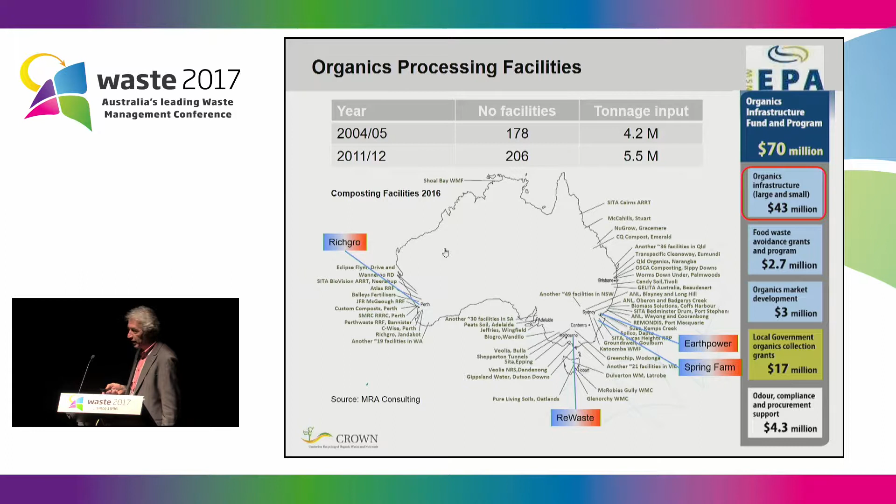We do have some anaerobic digestion facilities. They're generally wet facilities, as was talked about. I'm not from New South Wales, so I'm not really au fait with what's happening there. I'm not sure if there are two or just one operating, but these were still on the web. Particularly here in New South Wales, with the EPA providing money for infrastructure, there will be more composting facilities, and probably more anaerobic digestion facilities too. Therefore councils and service providers really have to look at what technology is best, what suits the specific environmental conditions and particularly the material flows.

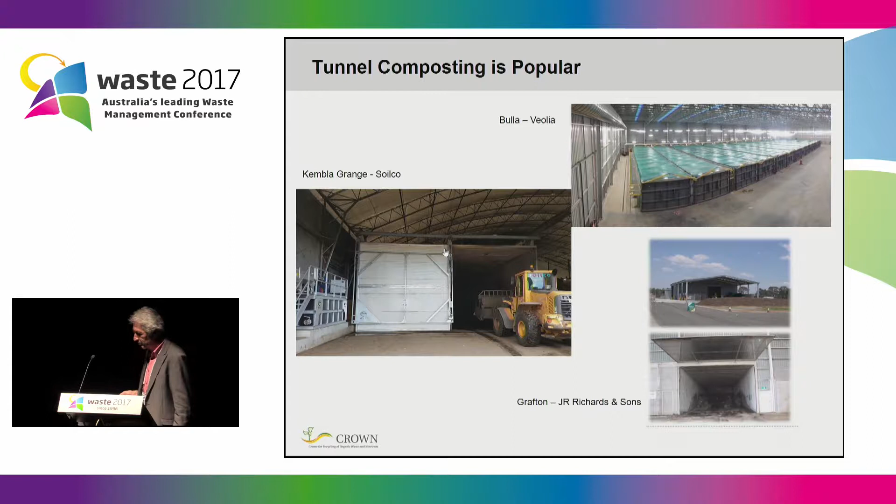Tunnel composting has become popular, particularly in New South Wales, because the money and government support are there to do it. These ones are here in New South Wales. That one is Veolia's facility in Bulla, but box tunnel composting has turned out to be the preferred option, and these facilities are being built. My question is, if you're doing tunnel composting, why not think about tunnel digestion? It's pretty much the same, as you can see here, doors loaded with a loader, not much different.

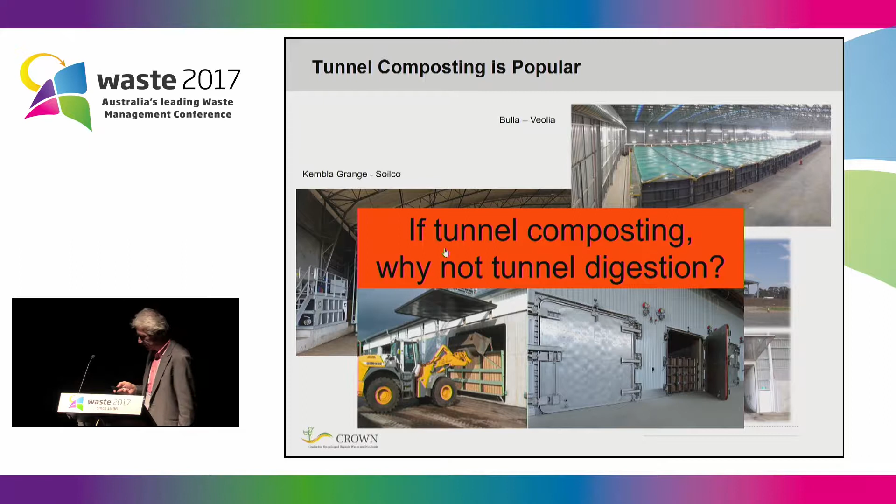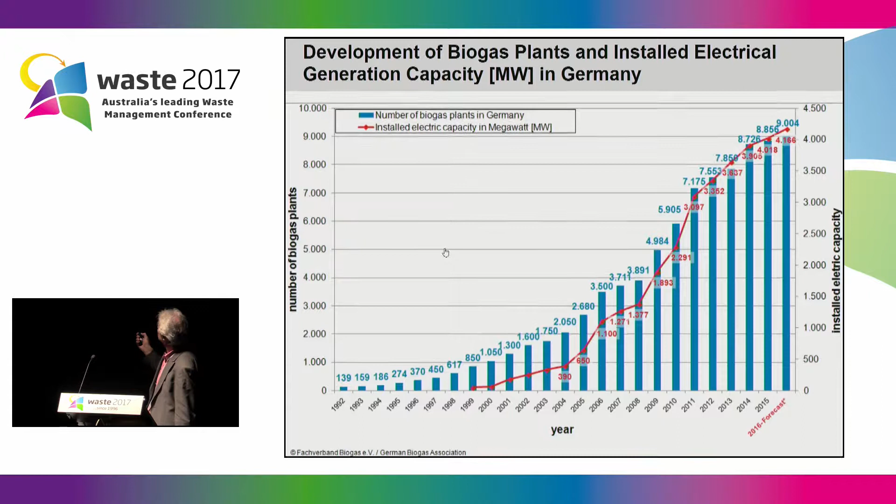Some of you might have seen this graph. It's pretty famous - this is the development of anaerobic digestion facilities in Germany. Around the turn of the century it just skyrocketed: 9,000 facilities, 4,000 megawatts, impressive, but most of it doesn't touch waste management at all. The vast majority are agricultural facilities using energy crops, so it's not really relevant for you.

These are figures from 2014: 75 plants processed FOGO, and about 40 were primarily commercial organics.

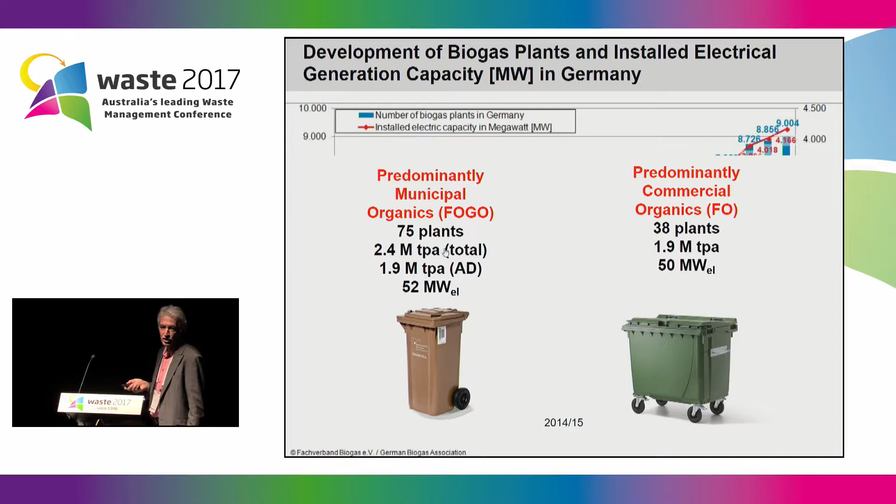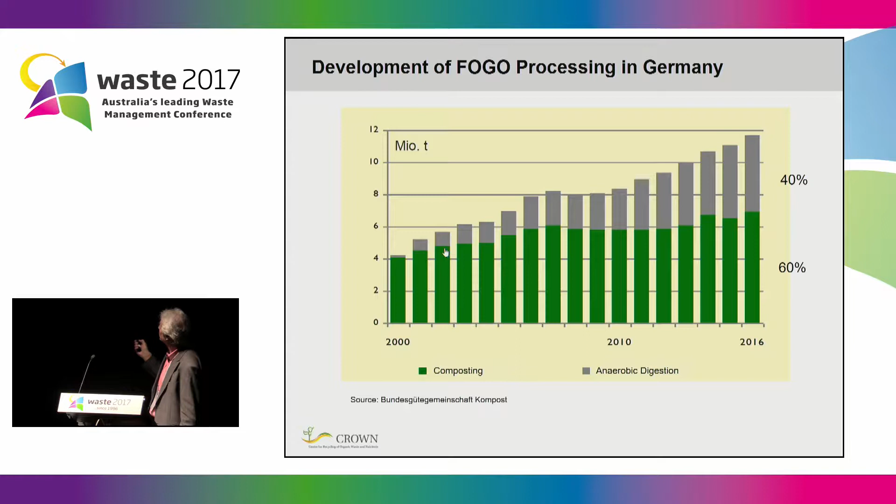This development really had an impact on the organics recycling sector. The green is the composting capacity in million tons, and the gray is anaerobic digestion. From around 2007-8, composting wasn't really increasing in capacity - that's sort of a perception. Composting is always part of anaerobic digestion, but all these facilities had anaerobic digestion as the first step. Today it's about a 60-40 split.

Just very briefly, the theory: wet digestion, we talked about that. Dry digestion with 25 to 35% dry matter, and then dry digestion 33 to 50%. This is really about what comes out of the curbside collection bins, and discontinuous or batch fermentation processes are designed specifically for this type of material. So the material flows you have and are aiming to deal with determine the type of technology - whether it's wet, continuous dry digestion, or discontinuous dry digestion.

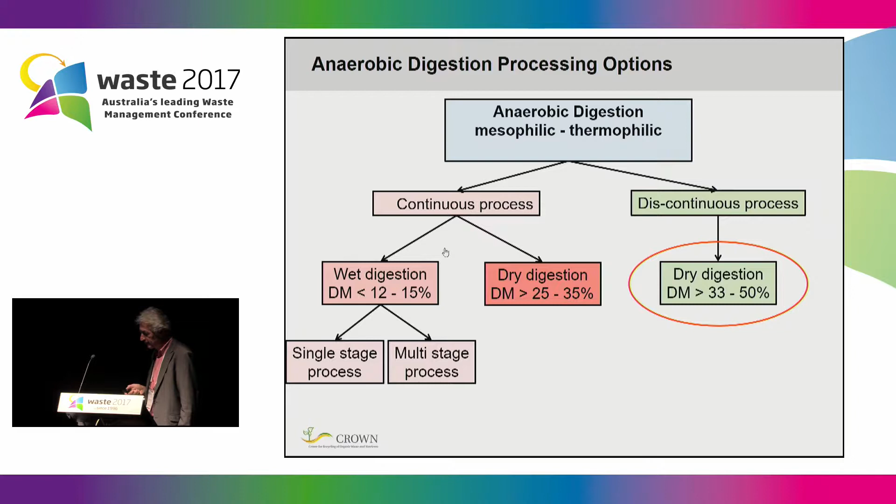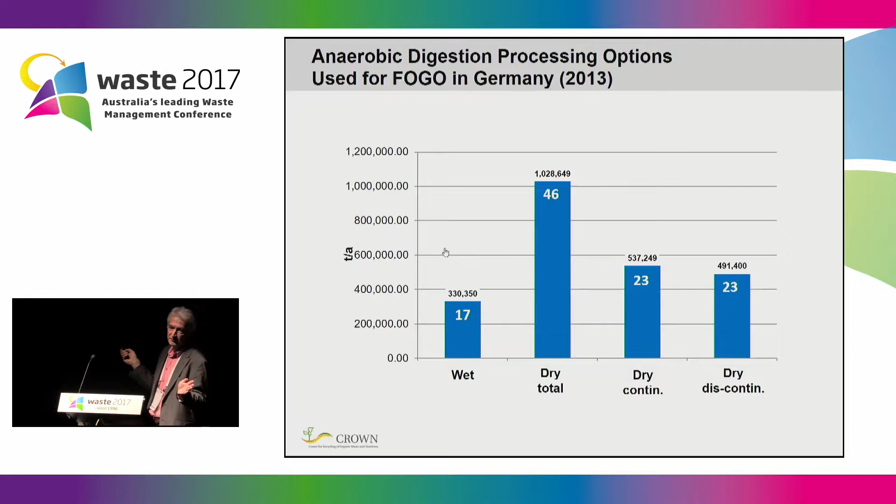We're not in the business of selling any technology, really just presenting it. This is the discontinuous type, and Mark Stenberg presented on this one last year. I just want to say this is also a possibility - you may have to add more water, or your whole feedstock has to have a higher moisture content. But also there are quite a number of different technology providers. It's really been well developed - a lot of changes, buyouts and whatever in this sector, but there are still 5-6 significant suppliers in Europe.

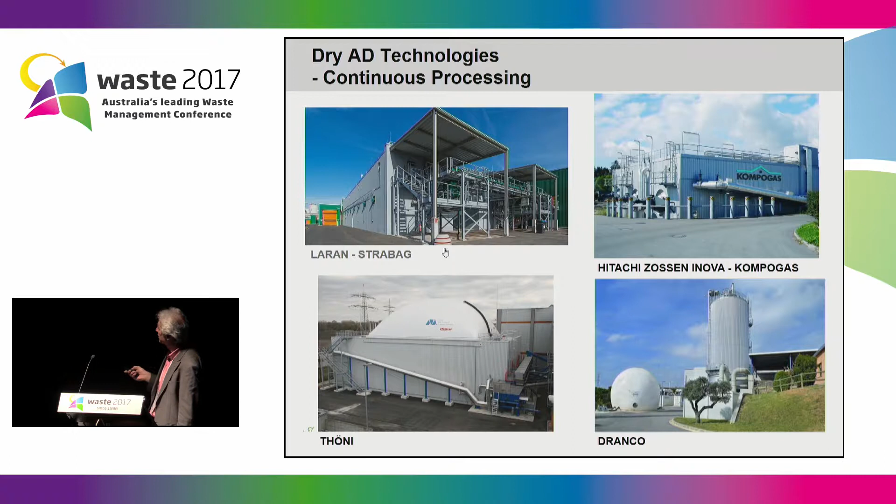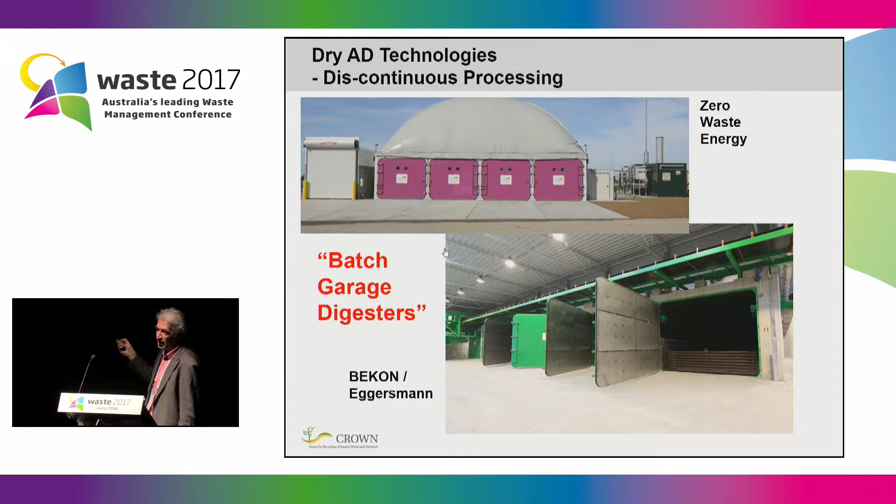This is what I want to focus on. They're primarily, I think, based in Germany, but this one is also a US system. So the idea really spreads because it makes sense - at least it makes sense to me. You can also see the system is pretty much the same as tunnel composting. You've got a door - this one is a bit odd shaped - but this is really the gas collection.

This is just a schematic view. This is essentially the box - it's filled with a loader. You're able to irrigate it, to put percolate in it to keep the moisture content there, but also to introduce the anaerobic bugs who will do the work. This is a collection system for the percolate, so some is circulated. You probably will have some surplus, but not very much. It's heated just in the walls or the floor, and has got a combined heat and power unit attached to it, supplying the heating but also the energy, the electricity.

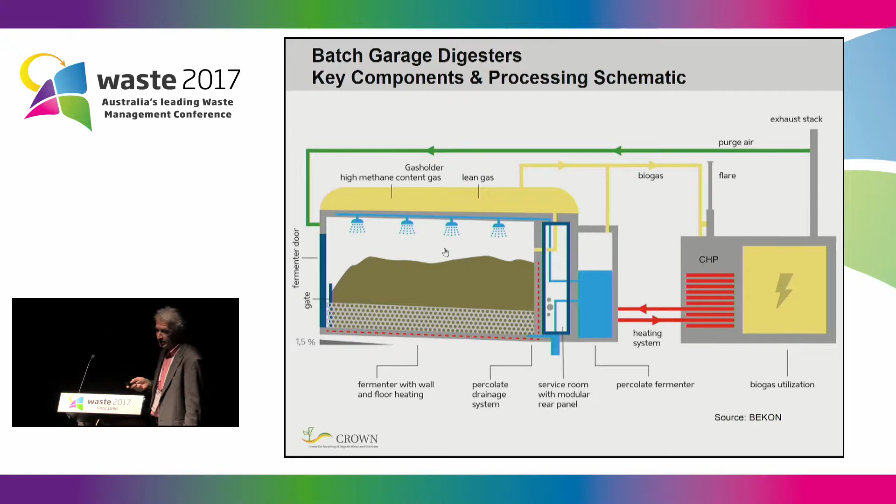Just very briefly, the processing stages. The first stage is aerobic. Essentially, air is being blown in, the normal composting system kicks in, the material heats up, which brings it to 50 or 60 degrees, and that's the desired processing temperature. At that stage, air is blown in, but no circulation of percolate or anything.

The second stage, you cut off the air supply, put in the leachate, introduce the anaerobic digestion bacteria, they get the anaerobic process started, and it stays like that for probably 2 to 3 weeks. Then the third step is you reverse that. Some of the remaining gas is just flared off, but then you introduce air again, make it aerobic again, so it's not an odor problem when you open the door and take the material out.

I forgot to say, during that process, biogas is generated here in the percolate store, but primarily out of this area, and it's just stored in a big plastic flexible container, and then going to the electricity and heat generation unit.

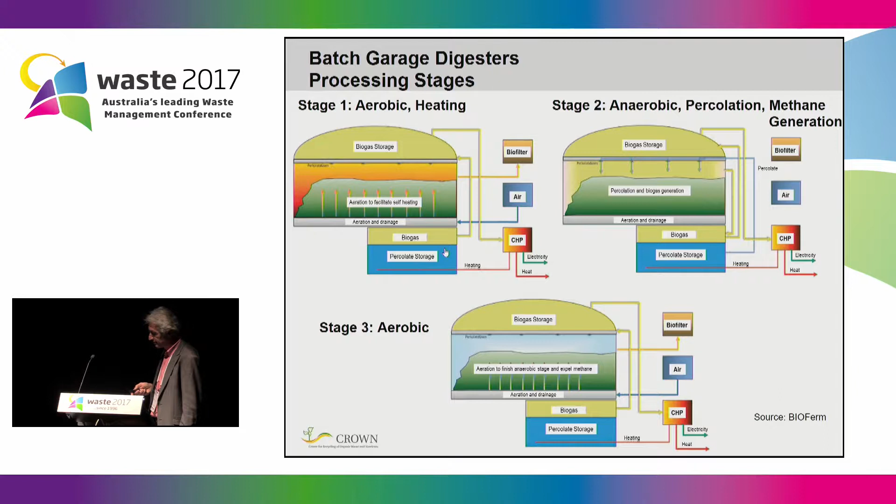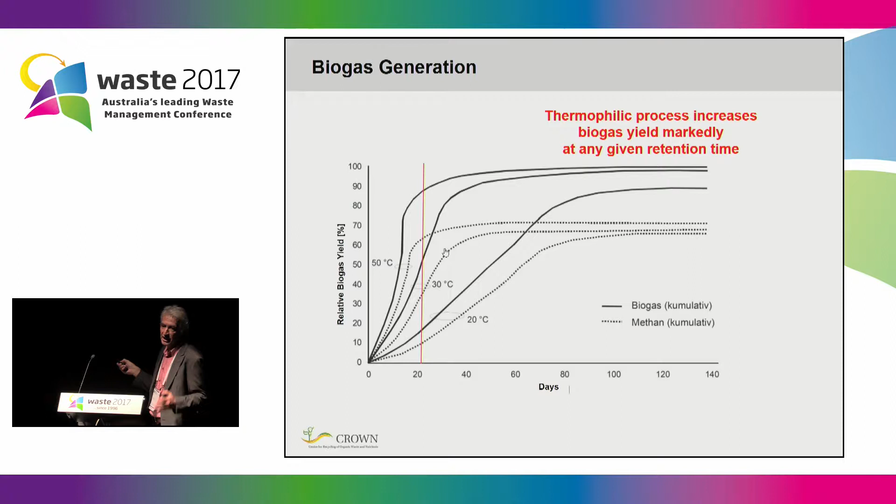This is a curve of methane and biogas generation. Biogas has about 60% methane, and that's really what you want. This runs at different temperatures. So if you do it at 50 degrees, you're probably 2 or 3 times as fast as if you do it at ambient temperature around 20 degrees. That's the reason why it makes sense to heat that chamber, because you do have the heat on site.

This is the methane generation curve from one unit over 20 days. Obviously it goes up and then slowly declines. And the aim of these facilities is not to generate maximum gas yield, but really to look for the economic optimum.

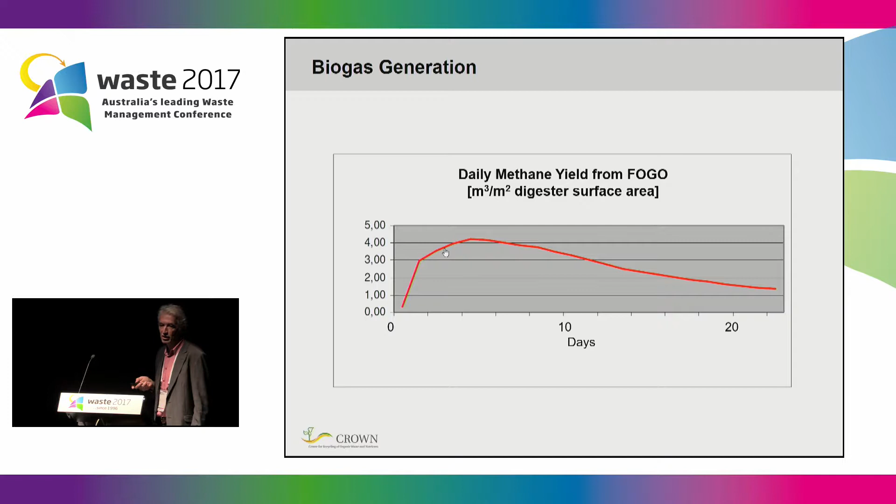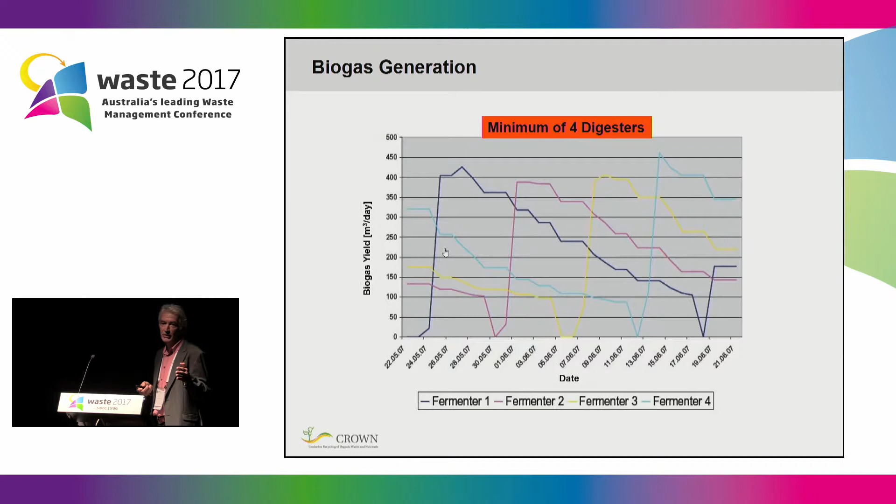The minimum to be able to generate a reasonably equal gas flow is you need 4 units, just because it goes up and then slowly down. So this is one of the constraints, but the units can be made any size you would like to have.

Biogas yields - if we just look at garden organics and food and garden organics, it's not ideal, but it's also not too bad. And as many composters do at the moment, if you also have some grease trap waste, adding some of that will certainly improve your yield and your economic viability.

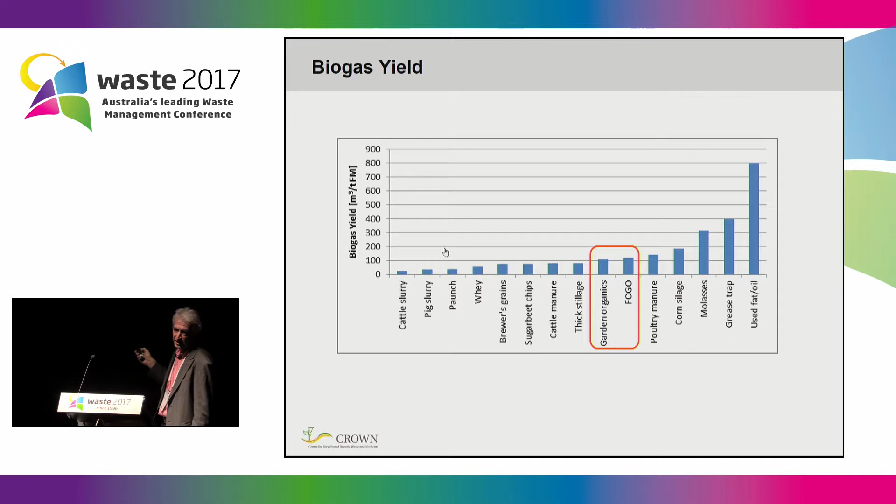And here, this is corn silage. That's what a lot of farmers in Europe do. So they would be ahead of the game, but still they have to produce that corn and make money out of it.

Just some average figures, or range figures rather, because it really does depend on the feedstock being processed, and to some degree also on the technology. But as a rule of thumb, you can say 1 ton of FOGO gives 100 cubic meters of gas at 60% methane, which is 600 kilowatt hours of energy.

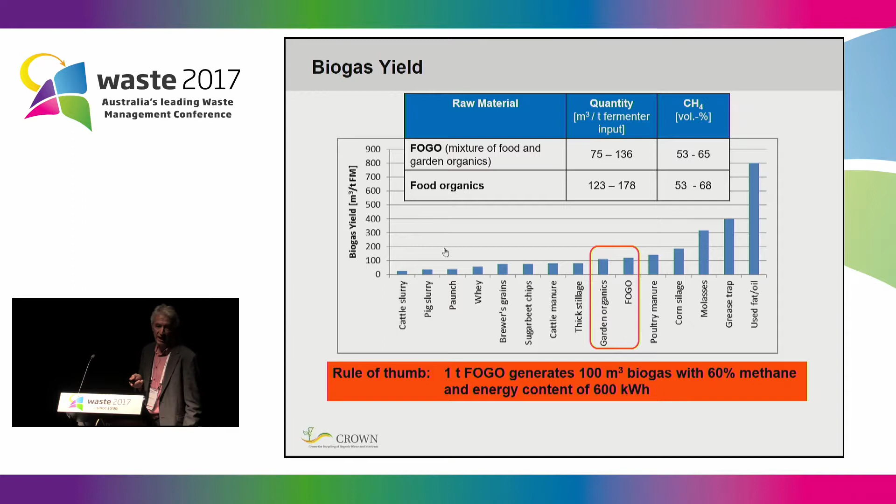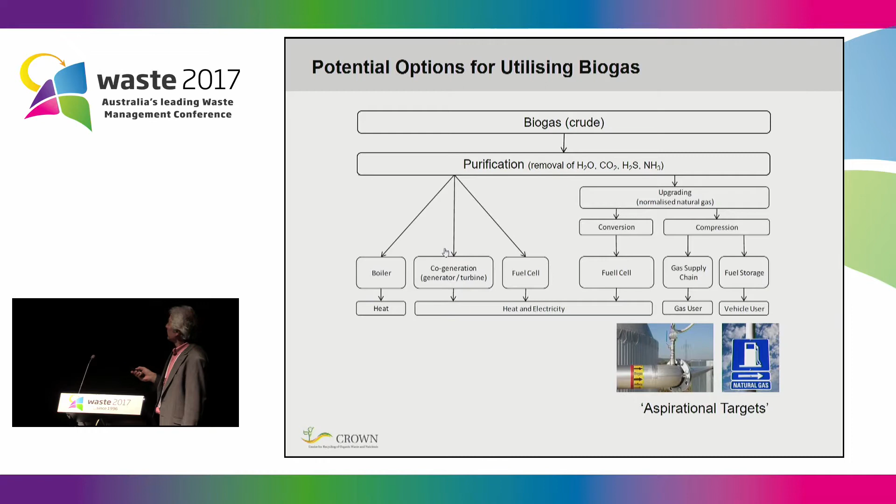The question arises, how do we utilize the biogas? It's good to generate it, but it only makes sense if you've got a use for it. There are, I would call them, aspirational targets. I think here in Australia that might be quite a long way off. In Europe, this is on the verge of happening - feeding it into the public gas supply. This is not too far off. I think in Australia, because we do have LNG for cars already, that might be feasible.

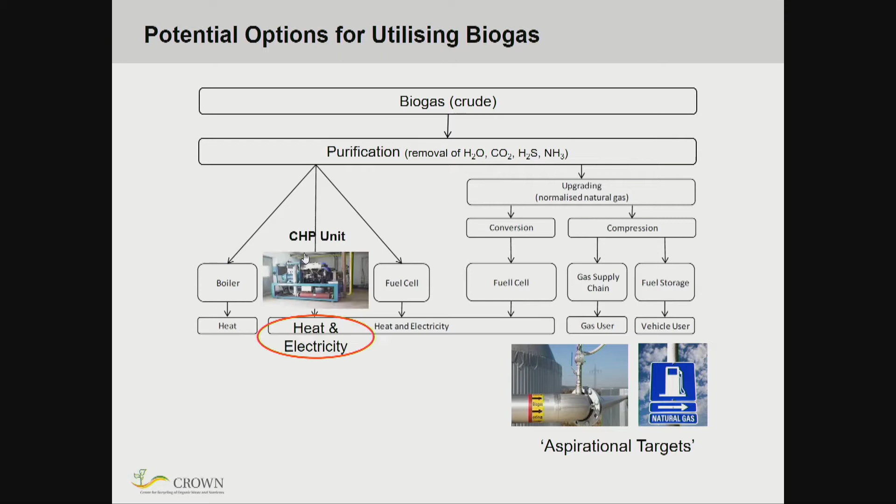But most really would have a CHP unit, meaning you're generating electricity and heat. Unfortunately, the split is not what we would prefer. I think we would prefer to have electricity, maybe 80 or 90%, but in a standard CHP it's almost a 50-50 split in heat and electricity. Electricity is relatively easy to utilize. Heat is quite difficult to utilize, particularly if you've got a composting site that's a long way from any neighbors who could use the heat.

Here I just put down efficiencies. The CHP is quite efficient in itself in turning gas energy, chemical energy, into electricity and heat energy. You need some to operate the unit, and then if you also look at the whole operation, which means load and so forth, you probably have got 30 to 50% net energy gain, which can be used off-site or for some other operations.

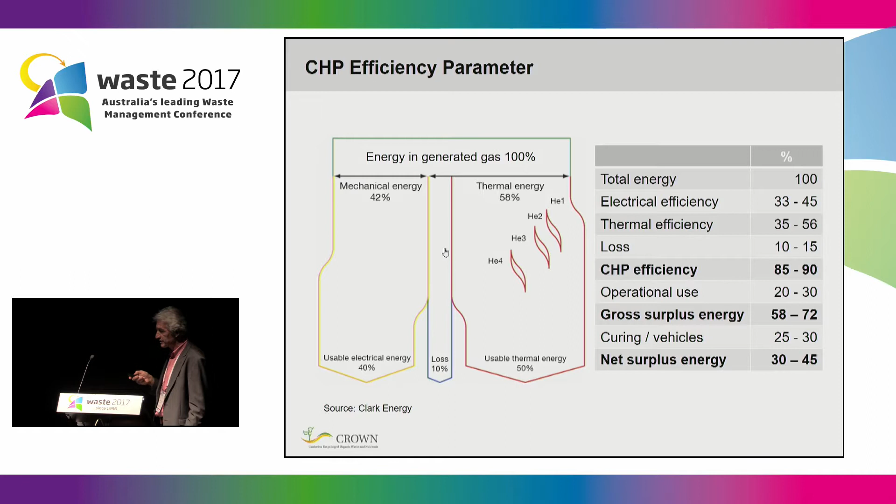I only have got costings from Germany, and would ideally love to apply costings like this here in Australia. So if anyone is interested, I'm keen to cooperate with you to really determine particularly income from energy generation - what's there, what do the electricity retailers pay, and so forth.

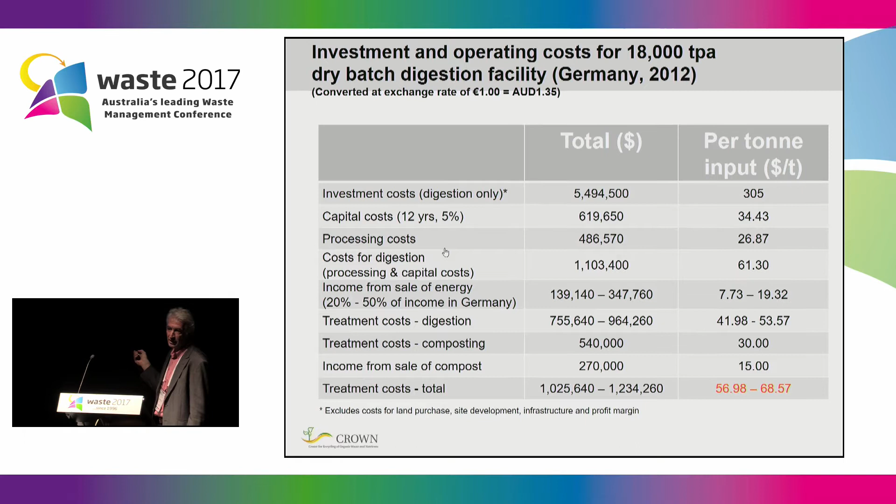So here are investment costs. This is an example for 18,000 tonnes per annum, 5.5 million. I think this is a lot more telling - costs per tonne input, and at the end, allowing composting treatment costs and also income from the sale of compost, while significantly reducing what the operators in Germany would get for energy. So this is just a rough approximation, but somewhere between $60 and $70, including composting, for an end product. I would think this is not too far off what in-vessel composting facilities cost to run and to have a product ready for sale at the end.

And therefore, to finish off, this is the scenario for the future: that garden organics, food organics, and some liquids go into anaerobic digestion, and that would really be the heart of future operations. Woody material can go into energy generation, and then these two energy streams would go to the end user.

But importantly also, it's in the digestion vessel only for 2 or 3 weeks, and then after that it's composted for another 4 to 6 weeks together with coarser or self-hauled garden organics. So not all the material is being digested, only really what's suitable, and the rest goes around it and is just co-composted at the end, with no difference at the end. It'll be certified compost, ready to go into urban or rural markets. And that's possibly the future.